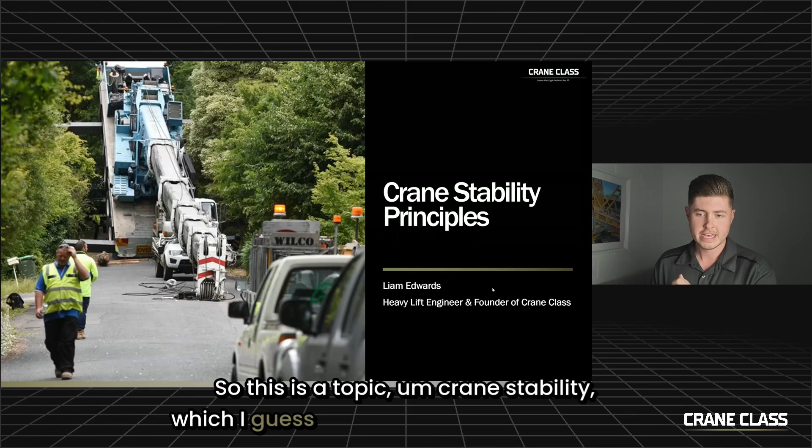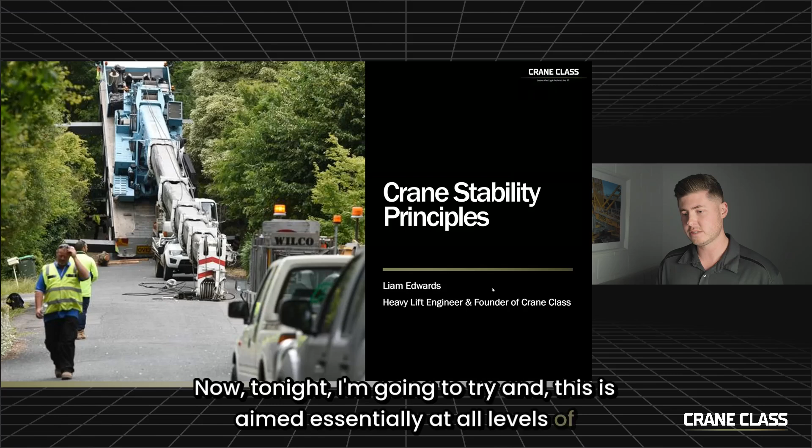So this topic is crane stability, which I guess is a pretty straightforward topic some people might think, but then you realize not a lot of people understand it on a slightly deeper level. Tonight, this is aimed essentially at all levels of expertise. If you're brand new and engineering and physics certainly aren't your thing, don't stress, because I'm going to really simplify the principles. Or if you are an experienced engineer or operator, this is also for you as well, because it might show you a different perspective to view cranes.

So let's get moving a bit further. First of all, I should introduce myself and Crane Class and what we do here. At Crane Class, we're Australia's leading training provider for heavy lift activities on Tier 1 construction sites. Our goal is to empower construction professionals, including anyone from site engineers through to supervisors and operators, and HSEs especially, with the skills to plan and execute heavy lifts safely and confidently.

Now, we exist because of one main reason that I call the construction industry's biggest knowledge gap. Lifting operations are arguably one of the highest risk activities on your construction site. But most construction professionals have never been properly trained how to plan and execute lifts safely. And whilst planning and executing lifts might be a step up, most people haven't been trained at the foundation level on simple facts of what are cranes and how do they work. That's one of the things we're trying to work on today.

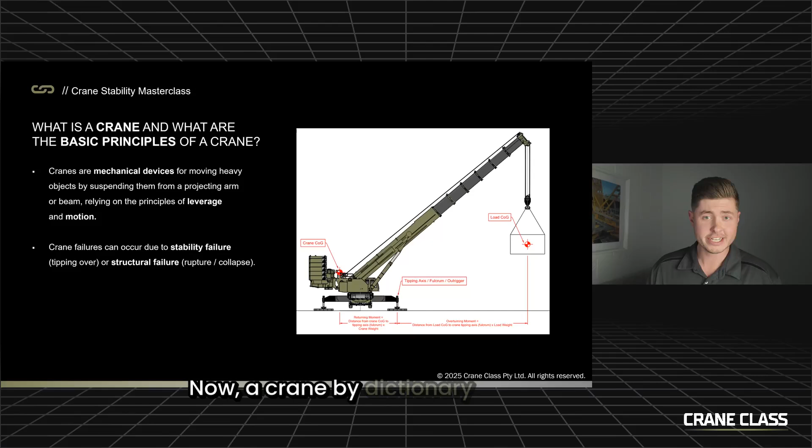Let's look at a crane itself at its absolute core. By dictionary definition, a crane is a mechanical device used for moving heavy objects by suspending them from a projecting arm or beam, relying on the principles of leverage and motion.

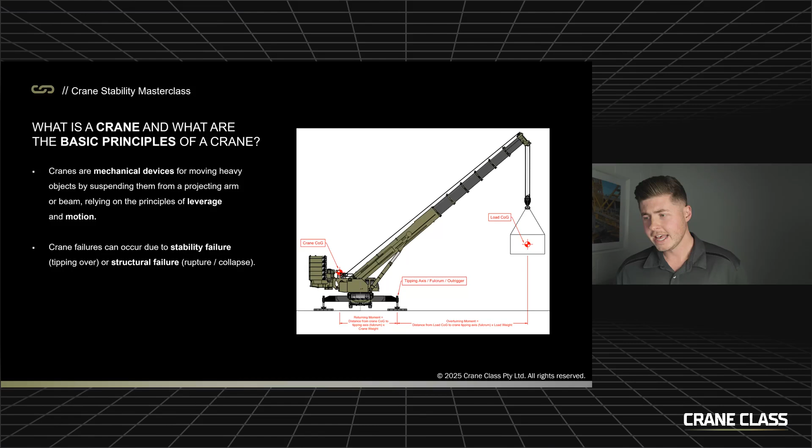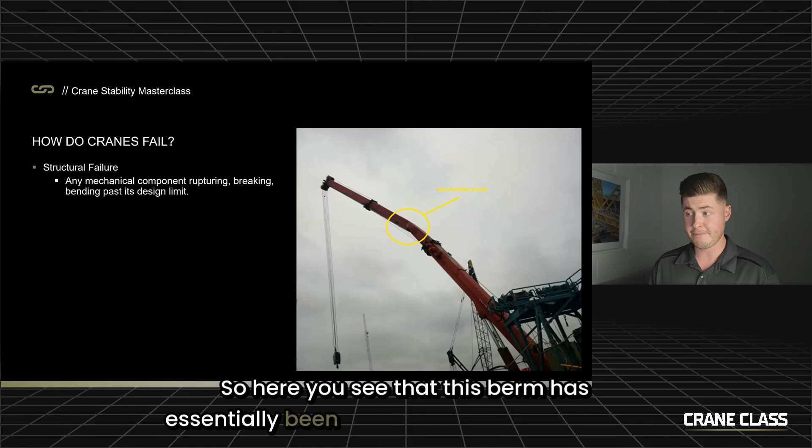To understand cranes a little deeper, we want to understand how cranes can fail and what the mechanisms are. There are two main ways a crane will fail. The first is structural failure, when a mechanical component essentially ruptures or breaks, pushed past its limit. Here you see this boom has been bent because it was pushed past its structural limit.

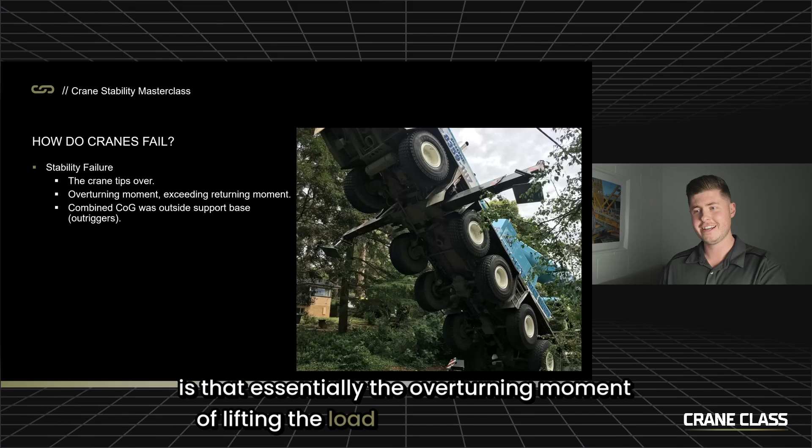The other mode of failure is stability failure, when the crane tips over. From a physics point of view, what I'm going to explain is that the overturning moment of lifting the load exceeds the returning moment of the crane and its counterweights, meaning the combined centre of gravity of the whole system was past the tipping point and the crane went over. That's a very quick summary of what we're going to break down further tonight.

First, let's look at the basics of load moments with a quick exercise. Here we've got a mobile crane, and let's look at it in terms of a line of outriggers at the front and a line of outriggers at the rear.

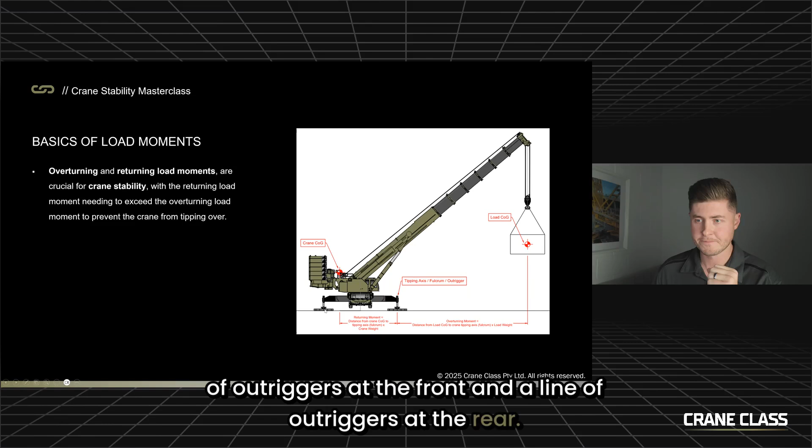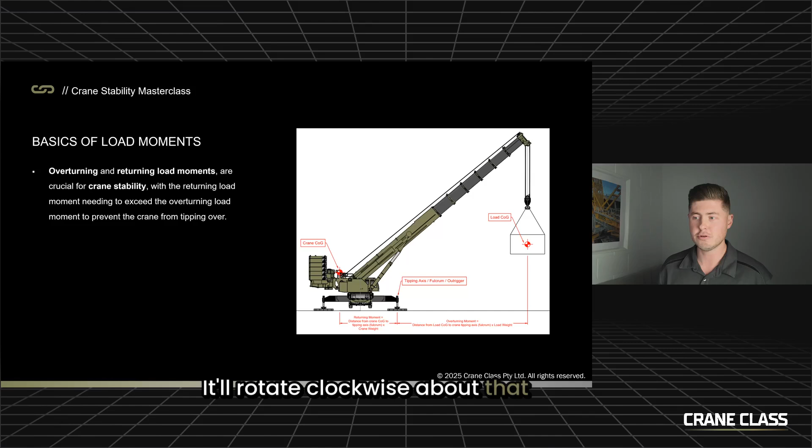Let's say this crane is lifting a load of 10 tonnes at a distance of 10 metres from the tipping point. We're saying this outrigger is the tipping point, or the tipping axis, the fulcrum the crane will pivot over - it'll rotate clockwise about that point if it were to go over. So the load moment out here is 10 tonnes at a distance of 10 metres from the tipping point, which is 10 times 10, giving us 100 tonne metres of overturning load moment.

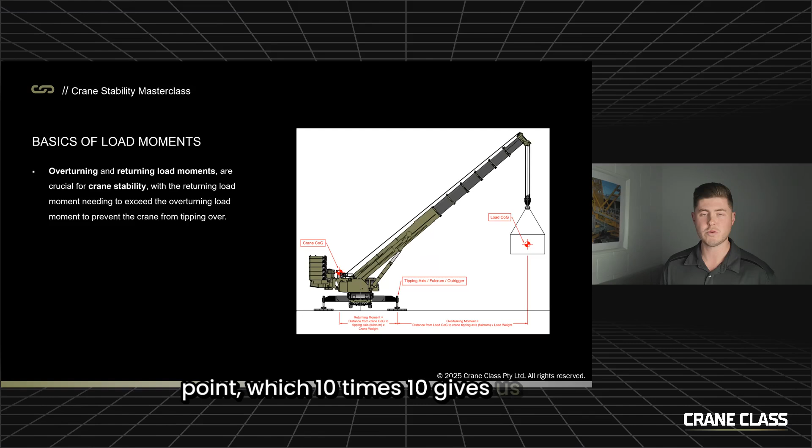Now at the rear we also have returning load moment. For the crane to not tip over forwards, the returning load moment needs to exceed the overturning moment to prevent the crane from tipping over. So if we've got 100 tonne metres at the front - that's the clockwise force pulling us over - we need at least that or greater to provide stability to the crane.

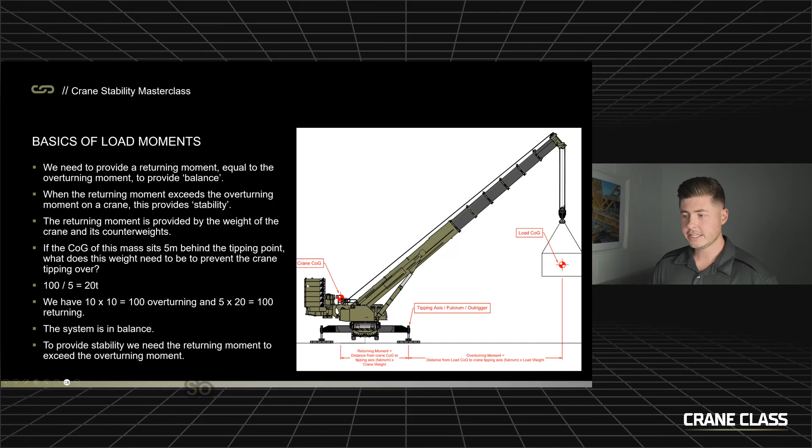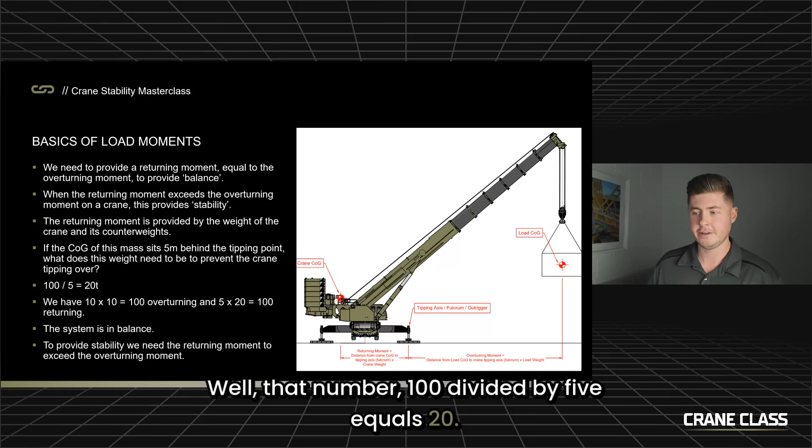Let's say the centre of gravity of the crane and its counterweights is back here, 5 metres behind the tipping point. We need at least 100 tonne metres, so we need 5 times something to equal 100. That number is 100 divided by 5, which equals 20. So that's telling us that if the combined weight of the crane and its counterweights is 20 tonnes, and the centre of that mass is 5 metres behind the tipping point, then we've got 100 tonne metres of returning moment. That would mean the system is in balance and the crane is at its absolute limit of stability - it's about to go over.

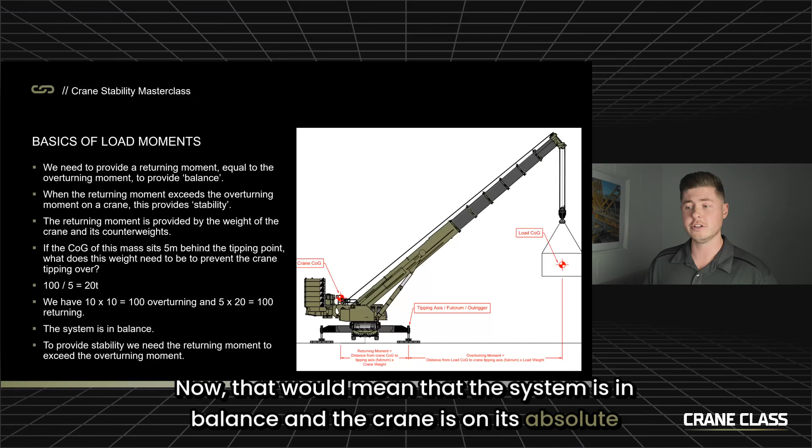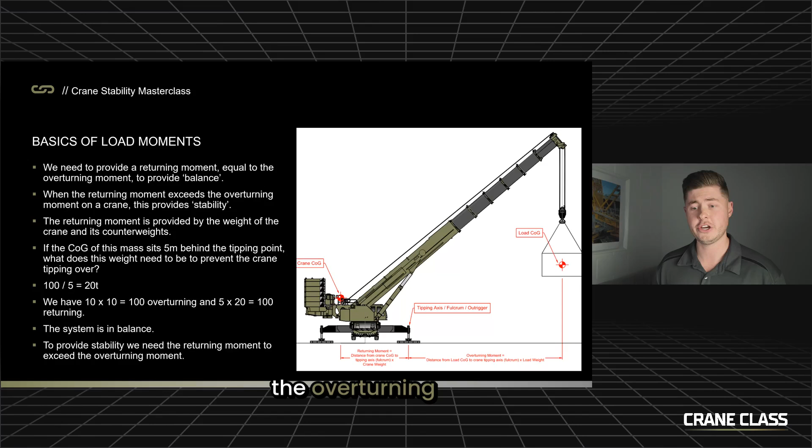So ideally, and the way cranes work, is that we have extra returning moment to counteract the overturning moment. Now I'm going to simplify this a little more right now.

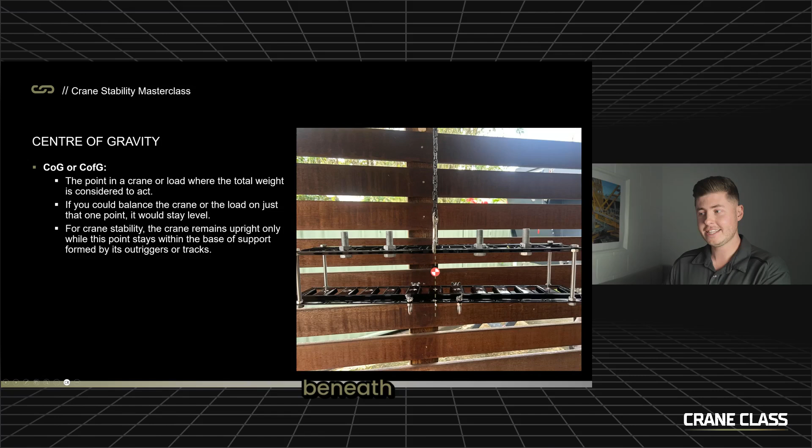The center of gravity is the point in a crane or a load where the total weight is considered to act. What that means is if you could balance the crane or the load on just one point, it would stay level. Right now we're hanging it above that point, but if we were to support it beneath that point, it would balance about that point. That's the basic concept of center of gravity.

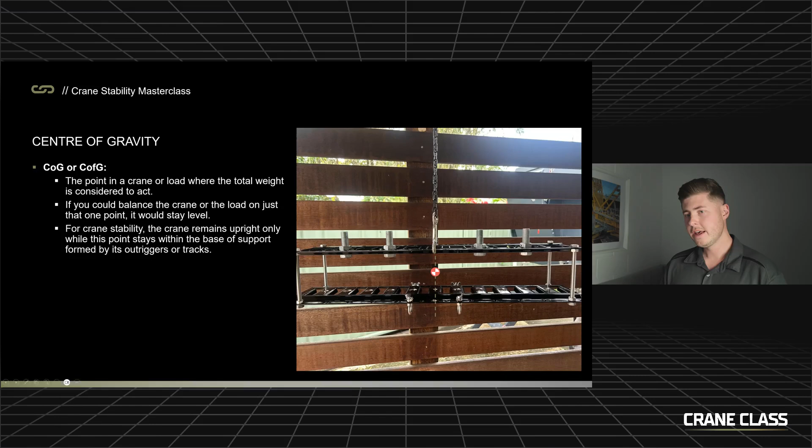Now, for crane stability, the crane will remain upright only while this point stays within the base of support formed by its outriggers or tracks. We'll come a bit further into that, but let's use this to clarify the basics of load moments.

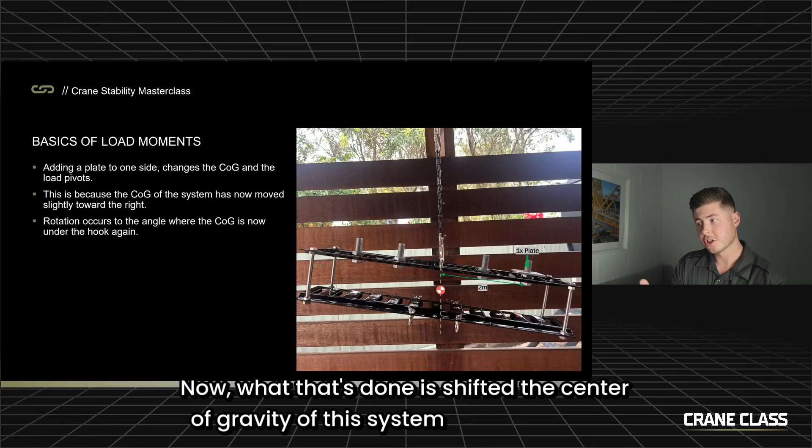So what I've done is I've added one plate to one end of the rig, at a distance of 2 meters, to keep it simple. What that's done is shifted the center of gravity of this system slightly towards the heavier end. Because we're hanging the load above that central point, that center of gravity wants to come beneath the point where it's hanging, so the load actually tilts and rotates to let that COG come back in, and we now have the load on a new angle.

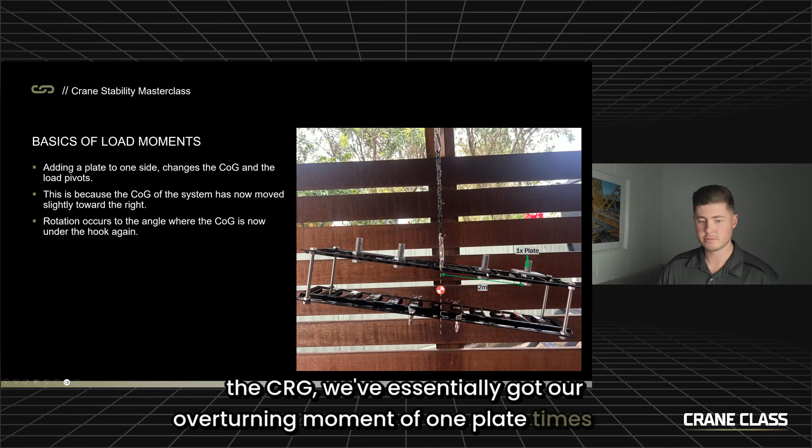Now, if I then go and add 2 plates at a distance of 1 meter on the other side of the COG, we've essentially got our overturning moment of 1 plate times 2 meters. So we can say that this is 2 ton meters, or 1 ton at 2 meters, so we've got 2 ton meters.

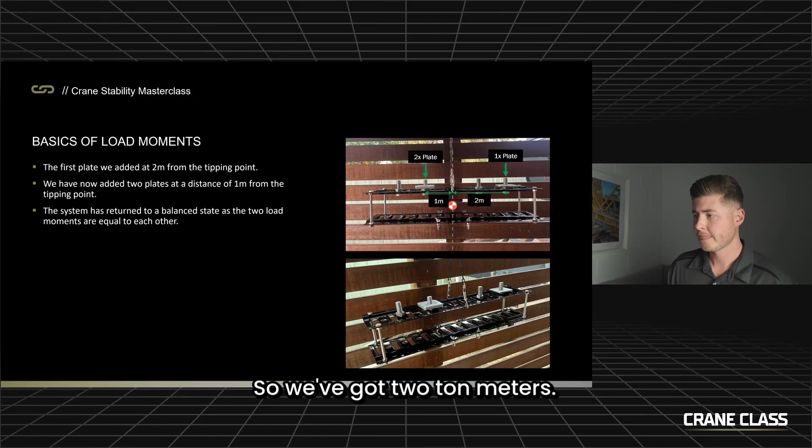And then what we've also got is 2 plates at a distance of 1 meter at the rear, the returning moment, which also equals 2 ton meters. So whilst we've got 2 plates at half the distance or 1 plate at twice the distance, both either side of the support point, this load is now level because those load moments have balanced themselves out.

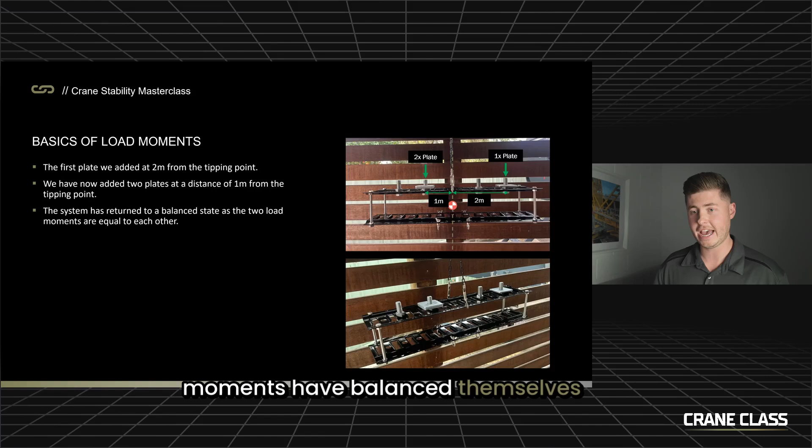All right, we're going to step this up a bit now and take this a little bit further. So what I've done is I've used this rig, this frame, to simulate a crane on outriggers. The first scenario, this black line is a table. This load was sitting on a table, and we're using these support points as outriggers. So let's call this the front outriggers and this the rear outriggers.

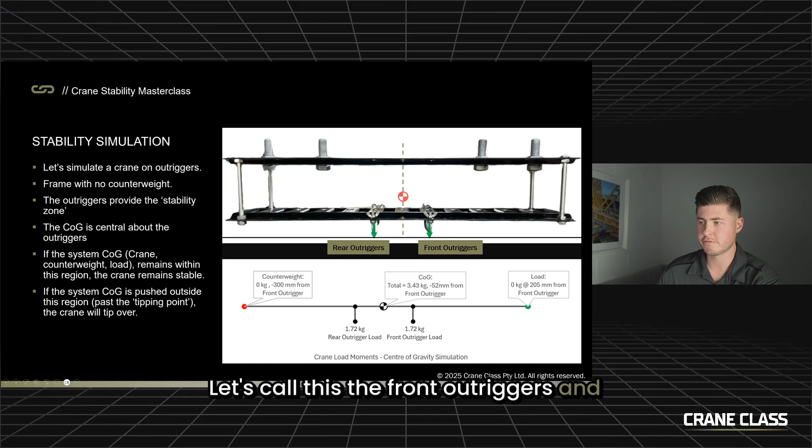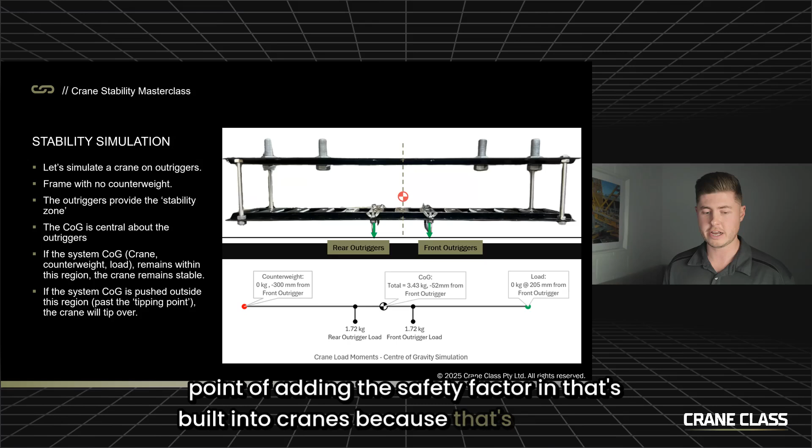What I also did was set up a spreadsheet and a graph that actually calculates the COG and the loads based on how I change the load. We're going to use this to describe stability, and then we'll take it to the point of adding the safety factor in that's built into cranes, because that's what we're going to get to tonight, to really understanding those safety factors. You'll see what load tips this crane versus what load it would be allowed to lift on if it was designed, say, to EN 13,000.

So right now, we've got this load, center of gravity, central between the front and rear outriggers. The frame right now weighs 3.43 kilograms. You can see that the reactions on the front and rear outriggers are equal. We've got no load on the front or the rear.

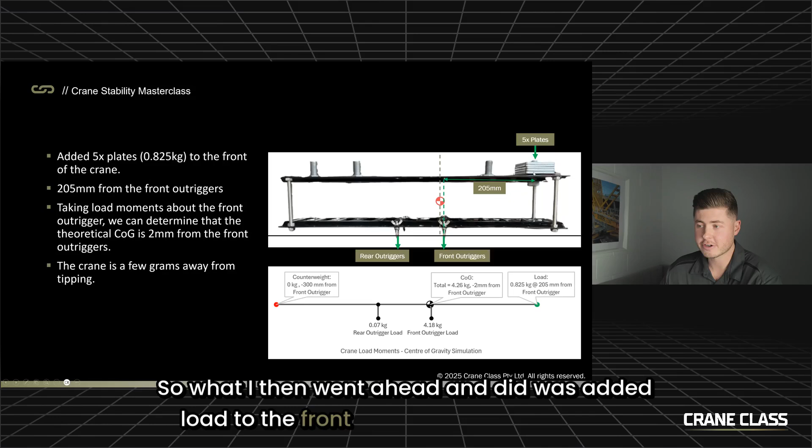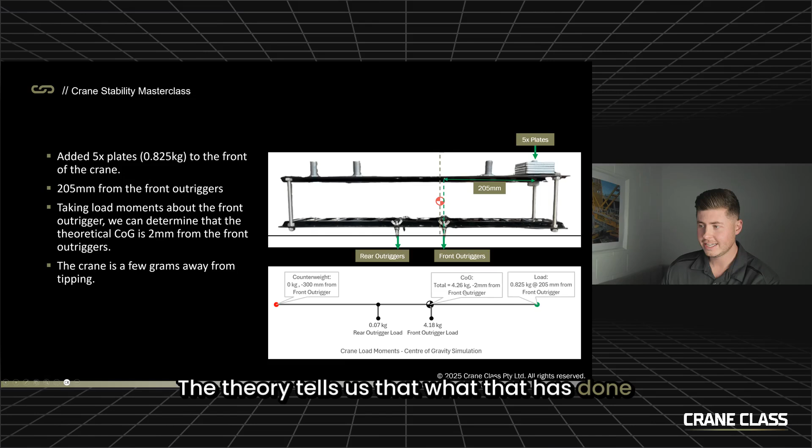So what I then went ahead and did was added load to the front of the crane. This is 5 plates at a distance of 205 millimeters from the front tipping point. The theory tells us that what that has done is shifted the center of gravity, the combined center of mass of this whole system, to a point that's 2 millimeters inside the line of these front outriggers. The crane was still stable there because that COG is inside the stability region, being the area between the front and rear outriggers.

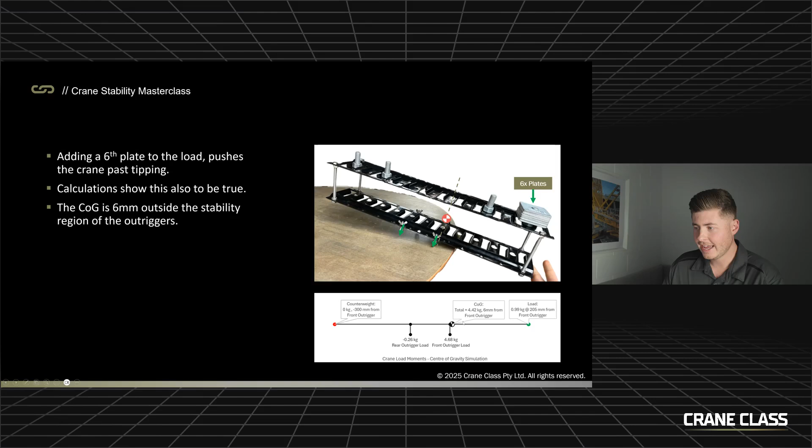I then went ahead and added a 6th plate. What that's done is failed the crane. The crane has failed in stability and tipped over. And the maths tells us the same, that COG is now 6 millimeters past the front outriggers, which means the crane itself tipped over.

Now we'll come back to that, but let's actually tie this back to a real crane right now.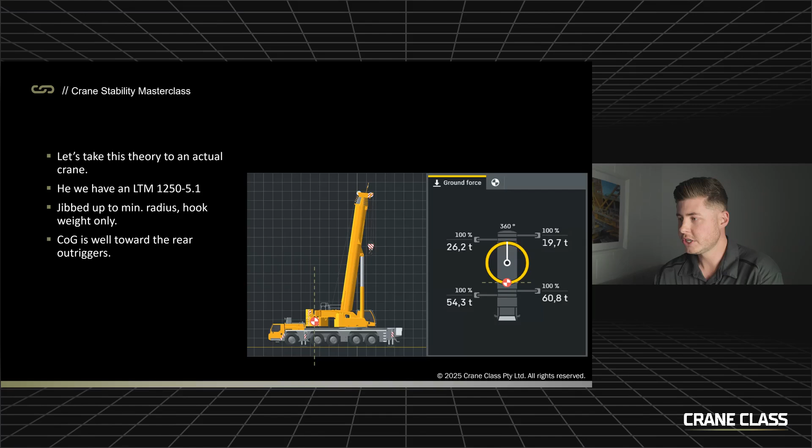So what we've got, this is a Liebherr 250-ton mobile crane, and I've simulated this in Crane Planner, their lift planning software. Right now, this crane's set up with full counterweight, and it's jibbed all the way up to minimum radius, boom sucked in, hook weight only.

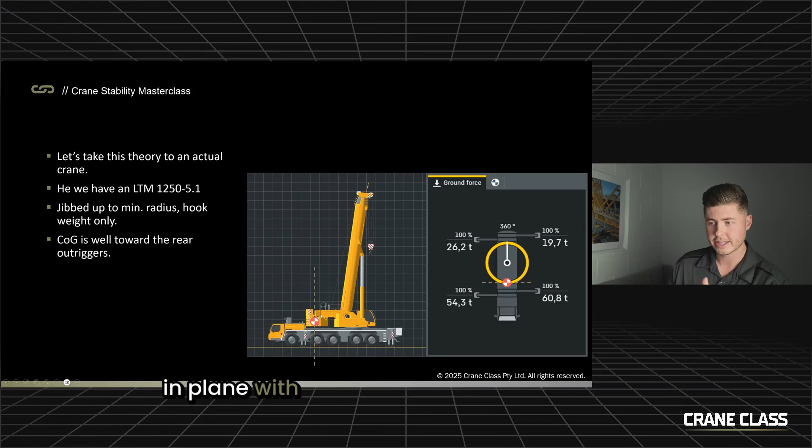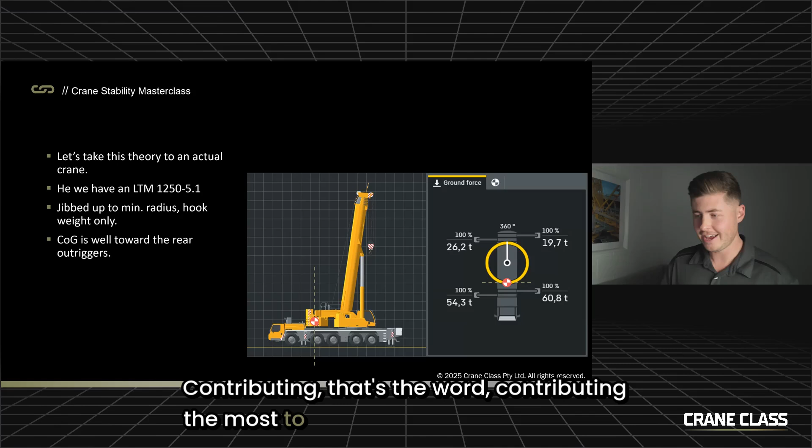Crane Planner gives us the COG of the crane. You can see in this situation right now, it's actually pretty much right in plane with the counterweight, because that is contributing the most to the overall mass of the crane. Basically, you can see that it's all the way towards, really this is the front outriggers, but I'm just going to call it the rear outriggers.

And that's just a key point, completely off topic, but that's why no load min radius in lift planning is often one of your most critical scenarios. When you don't have a load on the hook, you've got all your weight at the rear, and that's where you're at risk of going over backwards.

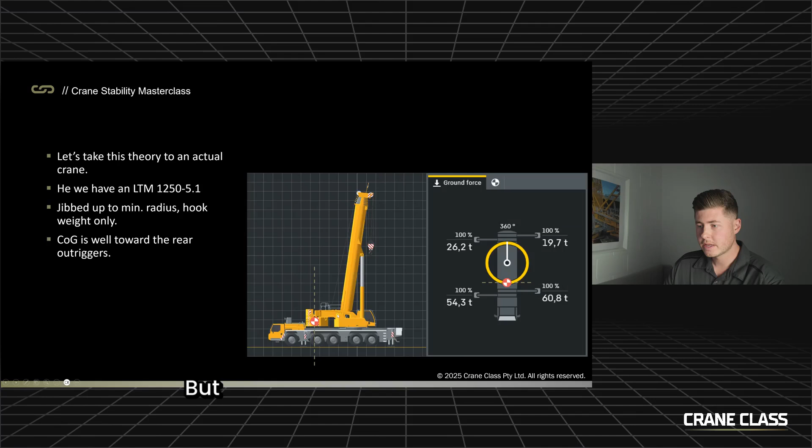But if we then go and add a load onto the hook of this crane, so I've poked some boom out, I've added some load, and I've pushed this crane to 100% utilization. What this has done is pushed that combined center of gravity of the system towards these front outriggers now. Now, you can see here that the center of gravity, it's still not on top of the front outriggers, which would mean the crane is still not close to tipping. But this is the limit that the computer is letting us go to.

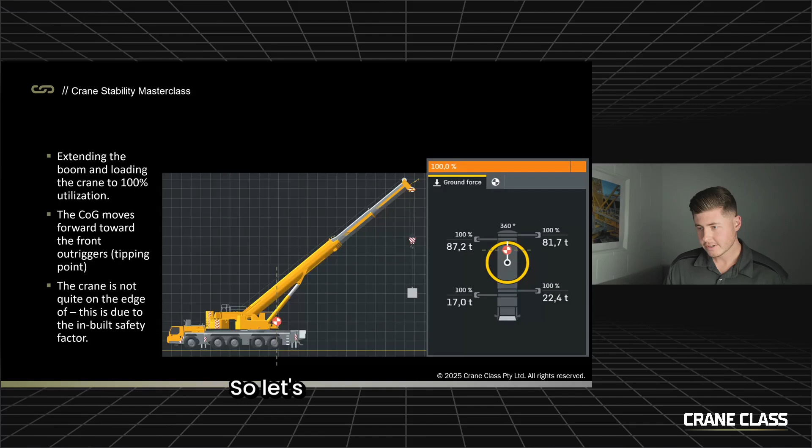So the question you should be asking is why? Why is that? The answer is safety factors. It's due to the safety factors that are built into the crane to prevent cranes being pushed to their absolute limit. So let's have a look at those now.

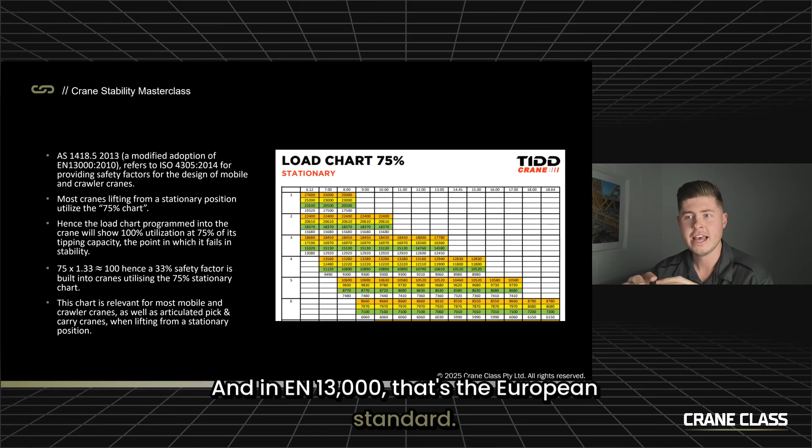Now, tonight I'm just trying to give a basic overview of this. You could dive a lot further into this, but to put it simply, in Australia, our mobile cranes are designed to AS 1418 Part 5, which is a modified adoption of EN 13000. And in EN 13000, that's the European standard, and that refers to the ISO standard, the International Standard 4305, to provide the safety factors for the design of mobile and crawler cranes. Now, you don't even need to remember all of those. Just know that we refer to an international standard in Australia to provide the safety factors for our cranes.

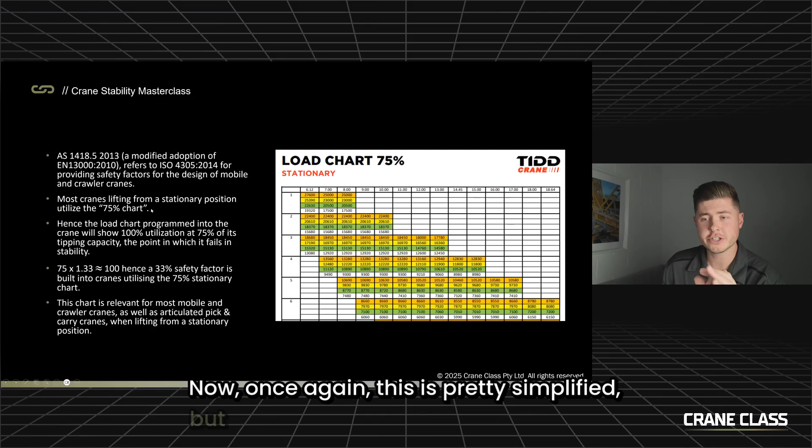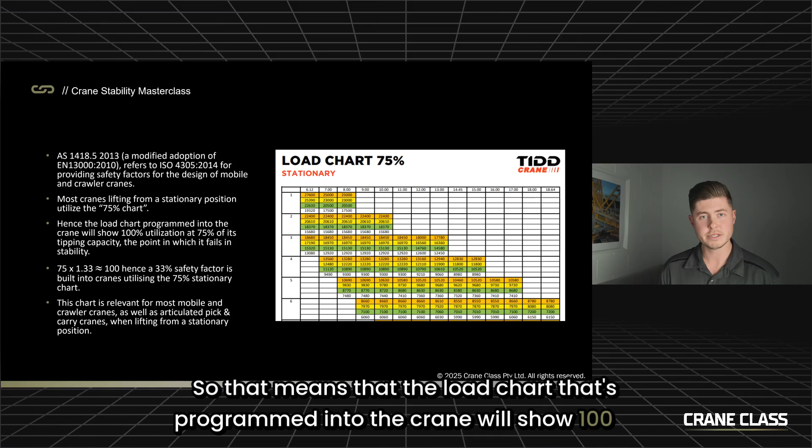Now, this is pretty simplified, but most cranes lifting from a stationary position will utilize what's known as the 75% chart. That means that the load chart programmed into the crane will show 100% utilization when the crane is at 75% of its tipping capacity, the point at which it would fail in stability. So to reiterate, if it would take 100 ton to tip a crane over, the computer only lets the crane lift 75 ton in that scenario.

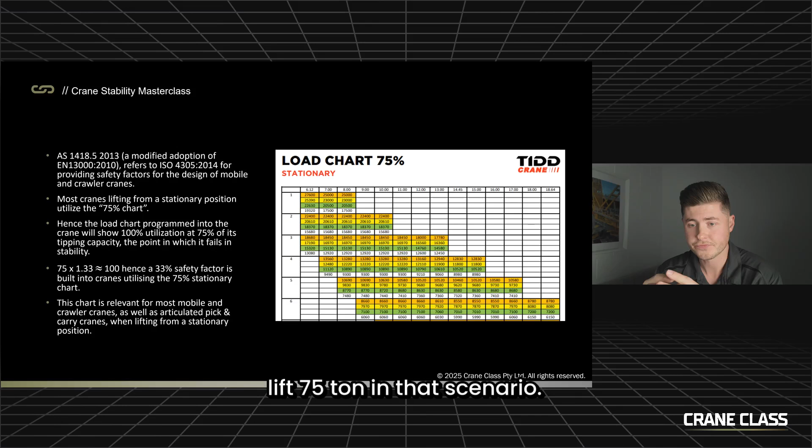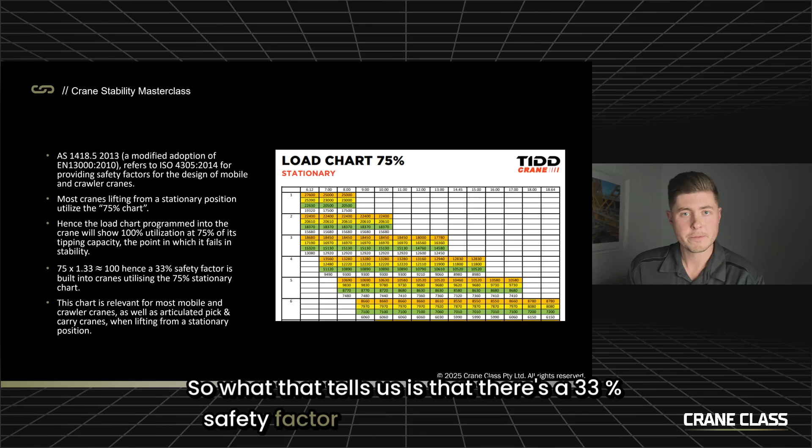Now, if we do some quick maths, 75 times 1.33 equals 100. So what that tells us is there's a 33% safety factor built into cranes that are using the 75% chart. Now, that might sound like a lot, but in reality it's not. And we still see cranes go over quite often. We'll tie that back in at the end on why it's really important to understand what that safety factor is there to allow for. But at this point, just understand what this 75% chart is.

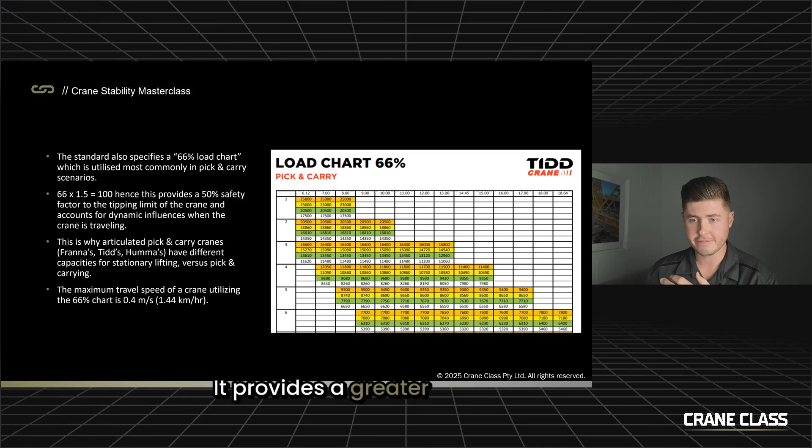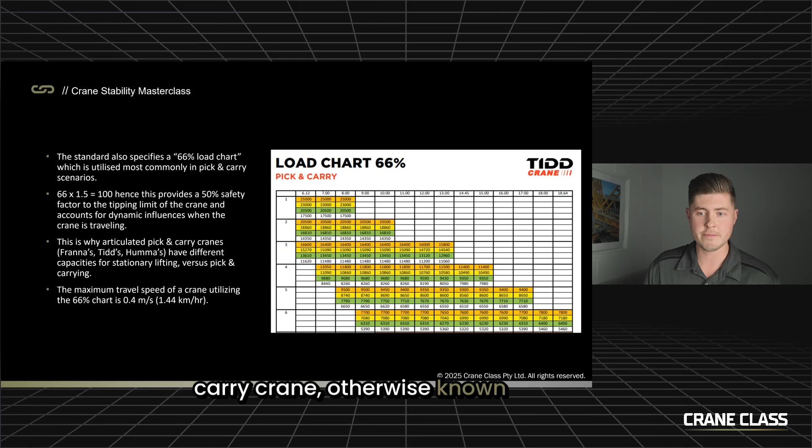Now, there's also a 66% chart. If I could have people talk, I'd be asking why people think we have a greater safety factor here. The 66% chart is used in pick and carry scenarios. It provides a greater safety factor to account for dynamic influences when the crane is traveling. So you see here, this is off a Tidd, which is another variant of an articulated pick and carry crane, otherwise known as Franna's, another variant. And when that crane is pick and carrying, it uses the 66% chart.

66 times 1.5, or 66.6 times 1.5 equals 100. So this hence provides a 50% safety factor to the tipping limit of the crane. And that might seem like a lot, but once again, we still see these cranes go over. So it is verified and there for a reason, and we will come back to that later on.

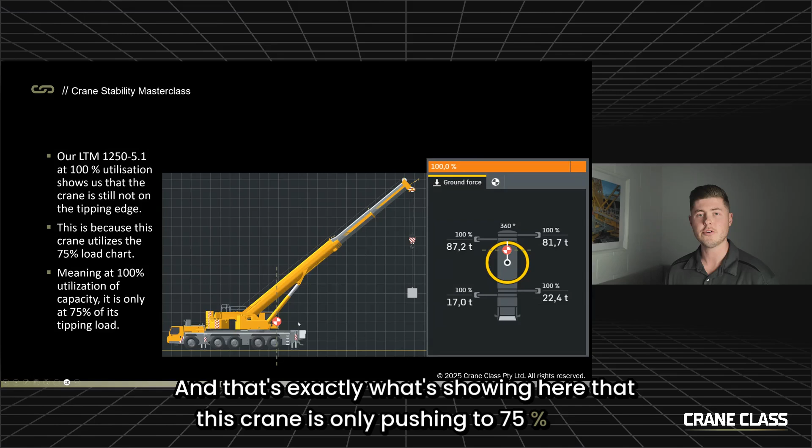And that's exactly what's showing here, that this crane is only pushing to 75% of the point where it would tip over.

Now, what I've done next is I've actually gone and programmed the safety factor into our scale crane, our model crane, you can call it. So we've seen here that at 6 plates, the crane was tipping over.

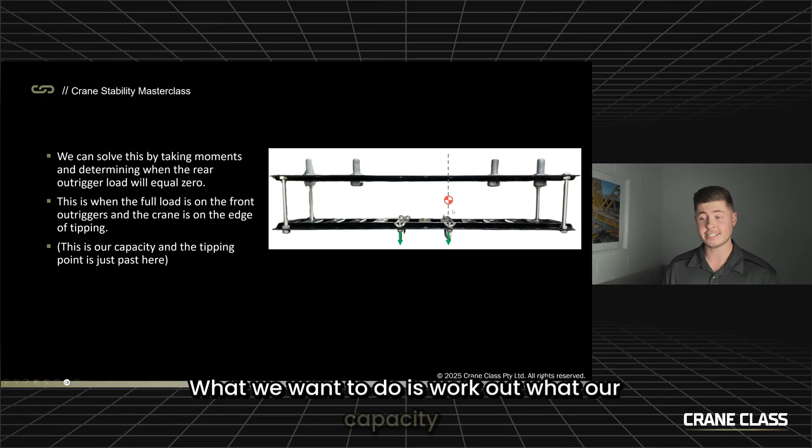What we want to do is work out what our capacity is, so what mass on this point will actually tip the crane over. Now, I'll take that forward here just to show.

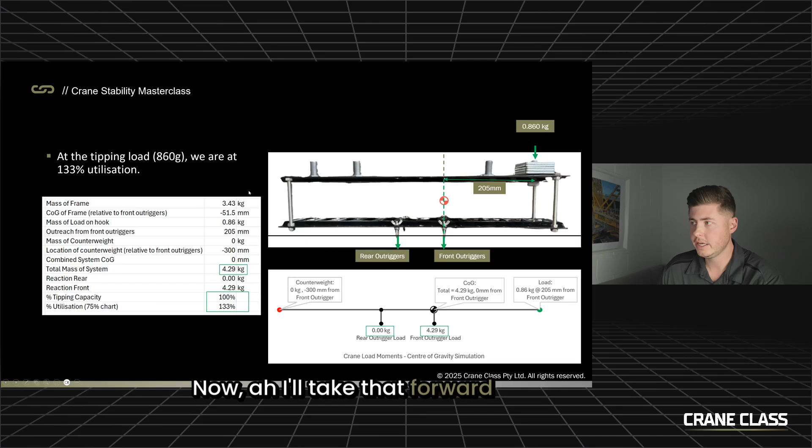What I worked out is that 860 grams is the limit that will tip the crane over. So our capacity now, our tipping capacity, is 860 grams.

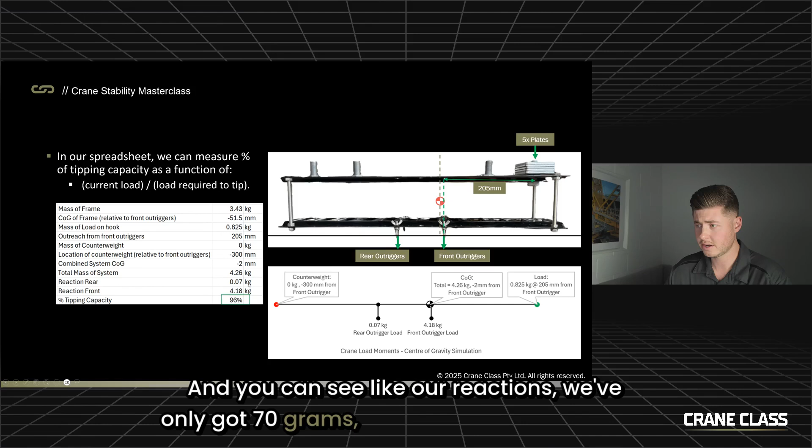But take that back, don't worry too much about all these numbers here from my spreadsheet. What you can see is that we've got 825 grams on the hook, which is these 5 plates. And our reactions, we've only got 70 grams on the rear outriggers, and we've got 4.18 kilos on the front. This crane is very close to tipping.

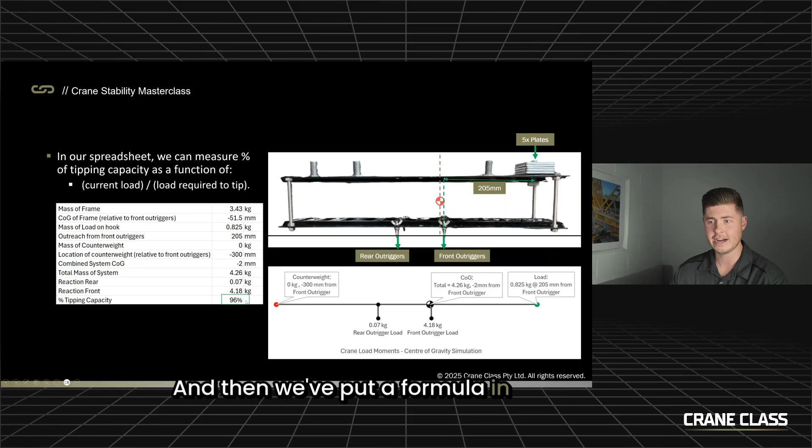We've put a formula in here, which is the current load being 825 grams divided by the load required to tip it, which is 860 grams. So as a percentage of our tipping capacity, we're now at 96%.

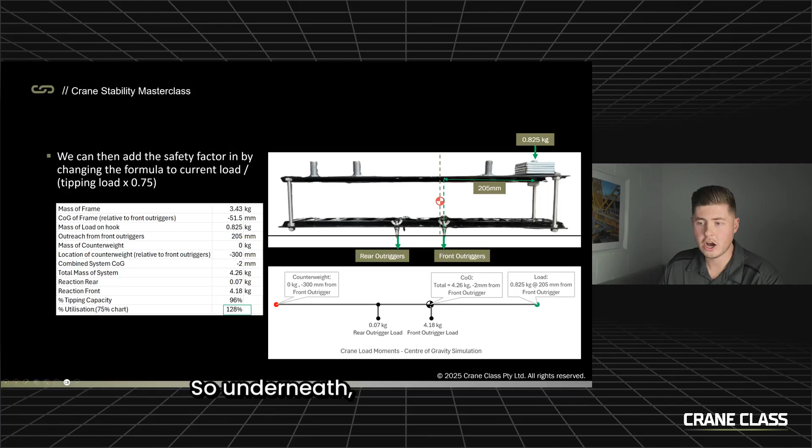But what we want to do is then add in the safety factor. So underneath, I've then put that tipping load times 0.75 to show what percentage of utilization we are actually at on the 75% chart. If I go a step further, hopefully this will bring it home for a few of you.

I've added a little bit more weight, taken it up to 860 grams. We're now at 100% of the capacity it would take to tip. One more gram and this crane would tip over. But we're at 133% of chart utilization.

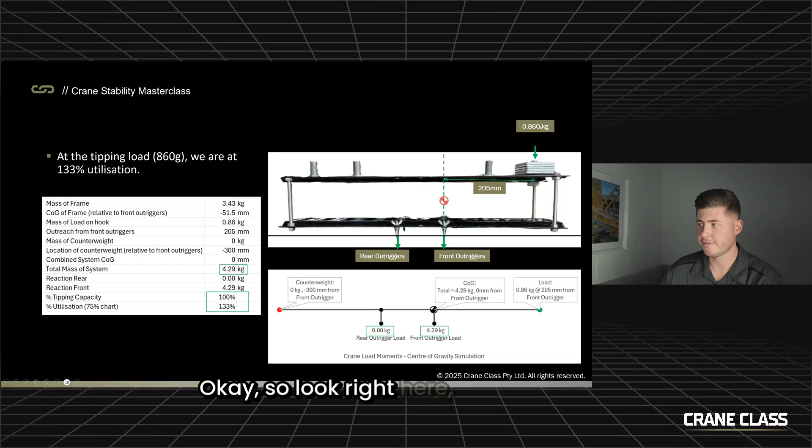Okay, look right here. So I've got 860 grams, and I've then wound that back to 645 grams. What that's done is taken us back to 100% utilization of the load chart. And at that point, we're at 75% of the tipping capacity of the crane.

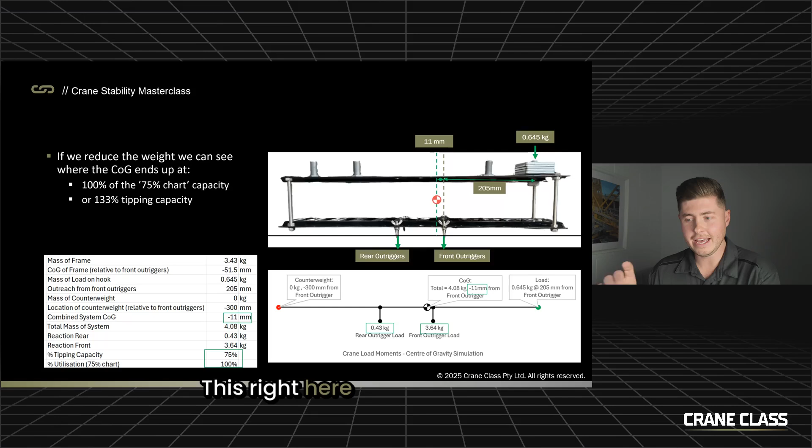This right here is exactly what we were seeing back then. This is how cranes work in real life. There's a few other tiny factors that come into it, but this is the overall basis of crane stability.

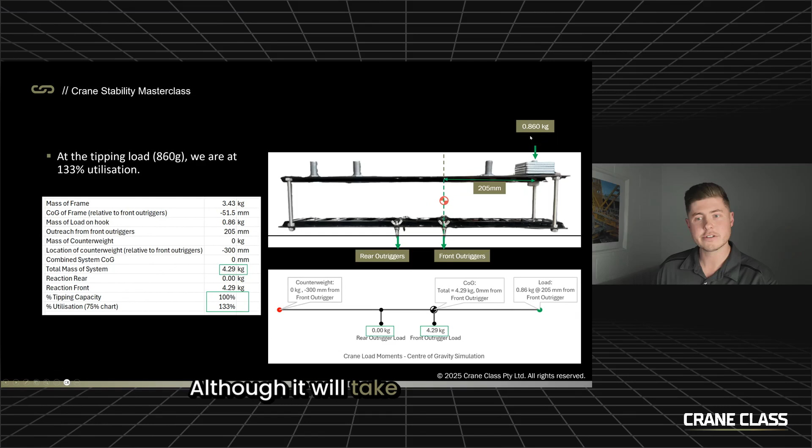So you see right now, this crane at 100% capacity can lift 645 grams, although it will take 860 grams to tip the crane over. And this is that 33% safety factor that's built into the crane.

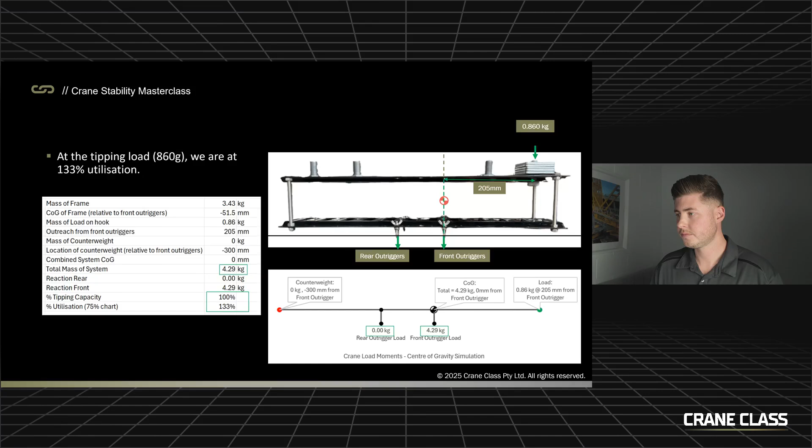Now, what we can also do is program the 66% chart into this as well. So you see before, I've gone back up to that tipping load of 860 grams. And you see now, whilst we're at 100% of the tipping limit, we're at 150% utilization of the load chart.

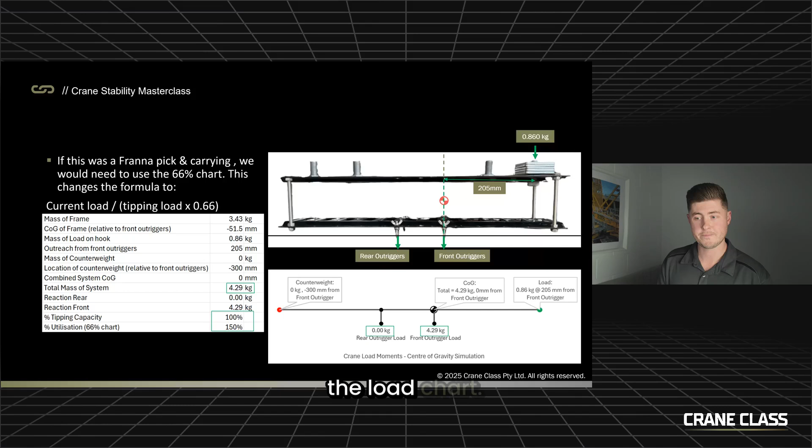So to wind this back to 100%, we've now had to drop the load down to 565 grams.

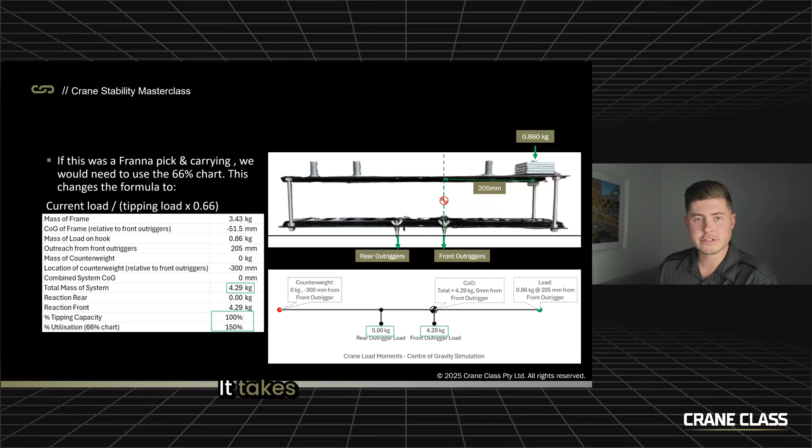Now, let's bring that back. It takes 860 grams to tip the crane. If we're standing still, we can lift 645 grams. And if we're pick and carrying, we're dropped down to 565 grams.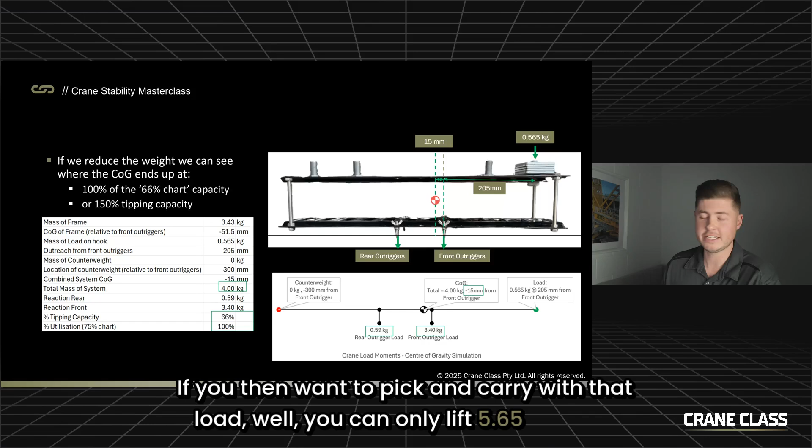This is exactly the scenario of if you were in a Franna and you picked a load stationary off a truck, you'd be able to lift up to, let's just call this, 6.45 tonne stationary off a truck. If you then want to pick and carry with that load, you can only lift 5.65 tonne in that configuration. So you'd need to probably reduce your radius, suck your boom in to get the extra capacity.

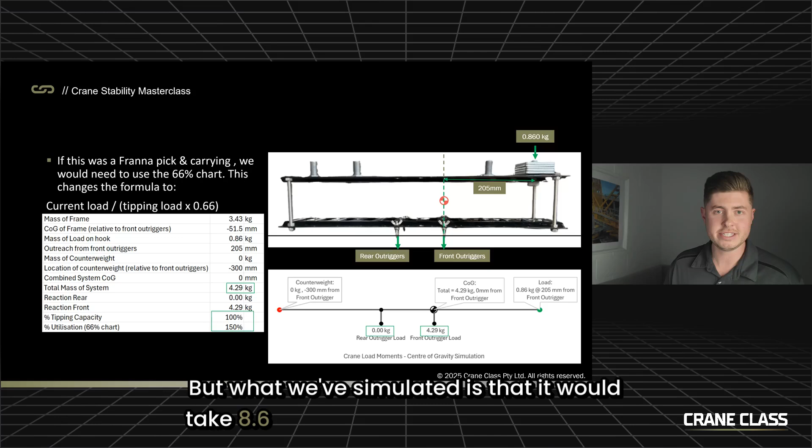But what we've simulated is that it would take 8.6 tonne to actually tip that crane in a controlled environment where there's very little other risk that can go wrong. And that's what we're going to come to in a second, because that might seem like a lot, but these safety factors are here for a reason.

And that's where we come to right here, that have you ever heard an operator or someone state jokingly that the crane has extra capacity up its sleeve? This is likely where they're coming from, but it's likely without a deeper understanding of why it is necessary.

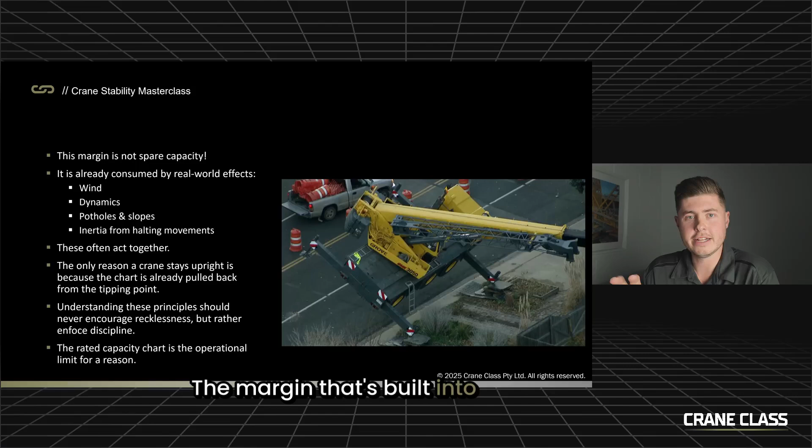And this is why. The margin that's built into cranes is not spare capacity. That margin is already being consumed by real-world effects. And that's why we see incidents like this occurring worldwide daily, but even in Australia, you nearly see a crane accident at least once a week, if not every couple of weeks.

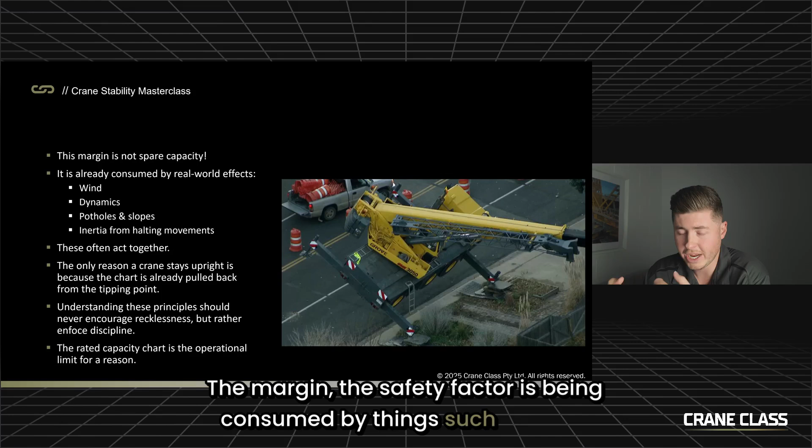The spare, well, it's not spare capacity. The margin, the safety factor, is being consumed by things such as wind. The crane needs to be able to take additional wind loading. Dynamics, now, that can be when you're pick and carrying, but it can also be dynamics of a load.

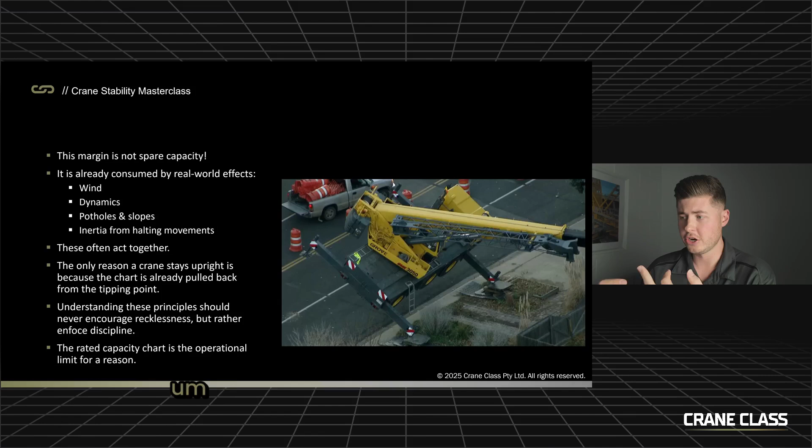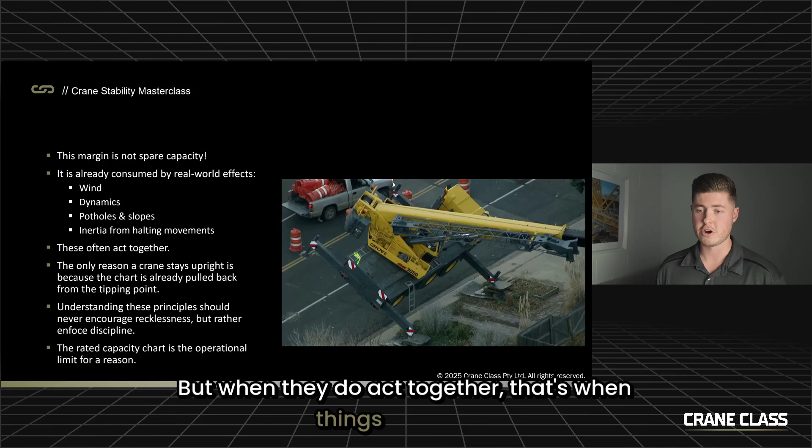So just that load bouncing around when you come off the controls, or when you come up and down, or the inertia from a halting movement. Even if you're slewing and come to a stop, no matter how slow that is, there's going to be some dynamics from that inertia into the crane. And the point is that these often act together, and that's why that safety factor might seem so significant. But when they do act together, that's when things go wrong.

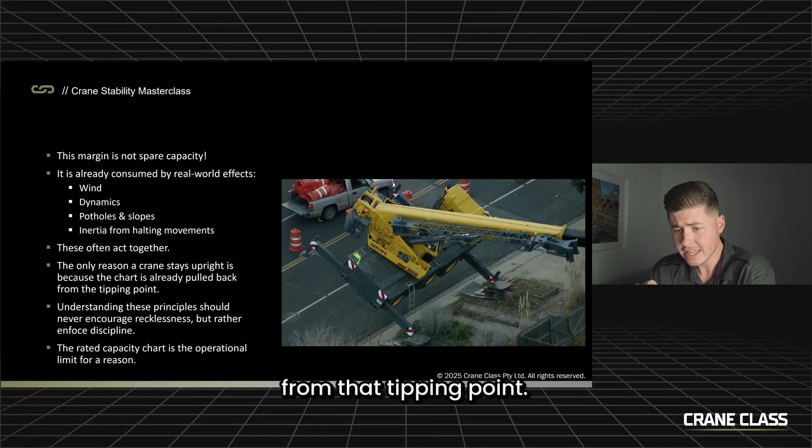That's why cranes have these safety factors built into them. The only reason a crane stays upright is because the chart is already pulled back from that tipping point. Understanding these principles should never encourage recklessness, but should enforce discipline. And finally, the rated capacity chart is the operational limit for a reason.

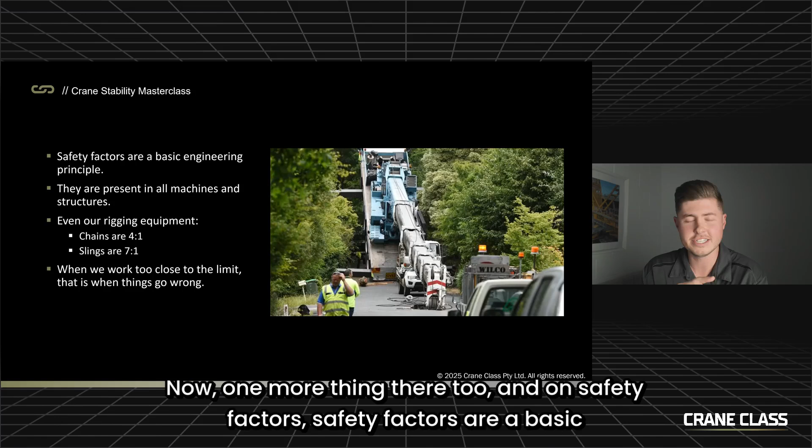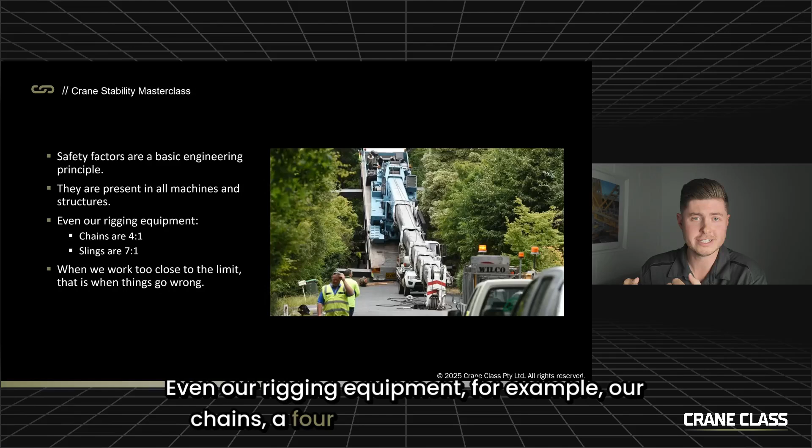Now, one more thing on safety factors: they're a basic engineering principle. They're not just present in cranes, they're present in all machines and structures. Even our rigging equipment, for example our chains, have a 4-to-1 safety factor, slings a 7-to-1 safety factor, which means you could put 7 times the limit a sling is designed for before it would fail. That's because there's greater risk involved with those devices than in the crane. So the crane can only be pushed an extra 33%, while a sling shouldn't fail until 700%.

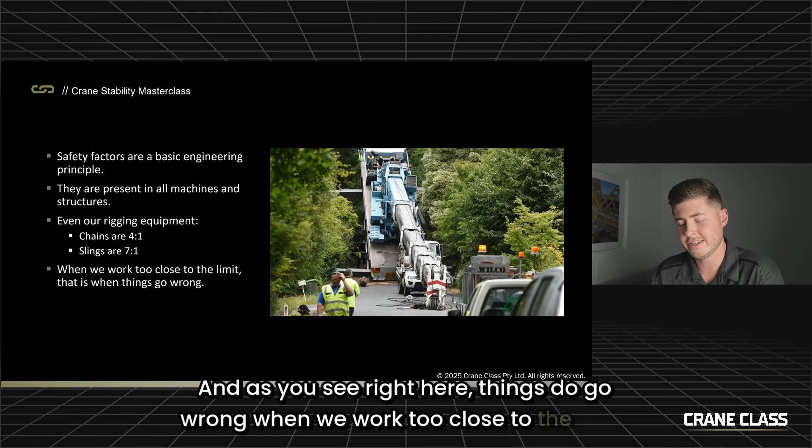Safety factors are in everything. And as you see here, things do go wrong when we work too close to the limit. So safety factors must be respected.